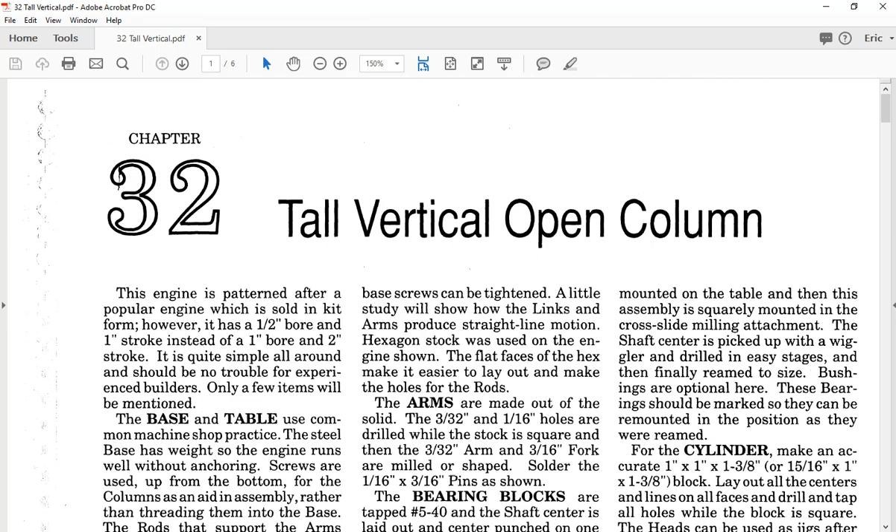Now, this is from a magazine that is no longer in publication, and it focused on model steam engines in England, the UK anyway. The pictures are horrible. Don't worry about it. You don't need them. Here's the view that you need to put it together. I know because I have drawn every part of this and done this assembly multiple times. This is all you need. Are there some weird things about this? You betcha. And we're going to go over those now.

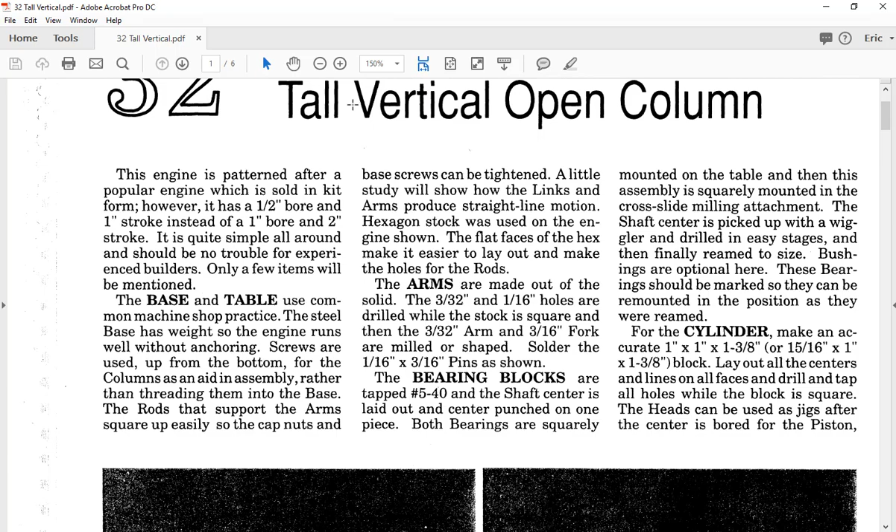First word of warning. All of these words in here are probably as important or even more important than the drawings. You need to read all of these words. There aren't that many of them. Another issue is that this was not drawn in any ANSI standard. This particular individual used fractions. We don't use fractions in manufacturing. We use decimal equivalents. Your role in this is in your drawing package, you will hold the decimal equivalent to whatever the fraction was that they called out. And you need to understand that.

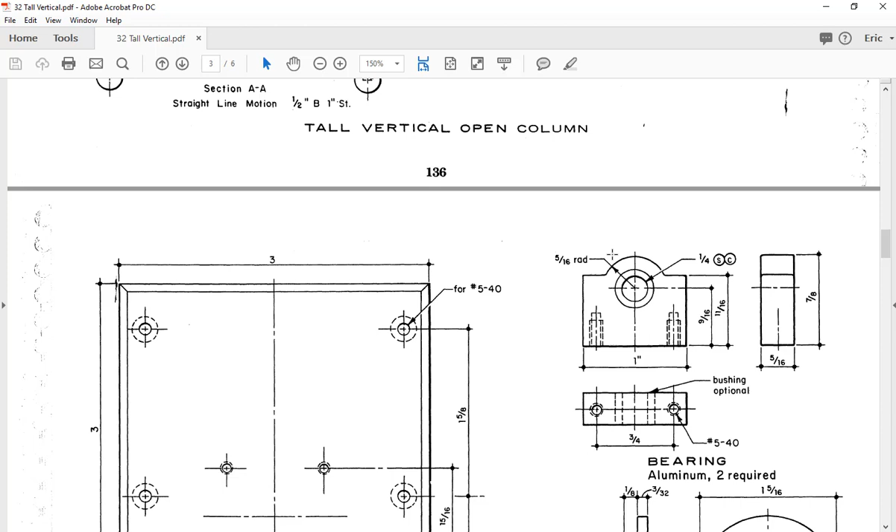Will some of these be 9 decimal places? They sure will. But the person or engineer or whoever drew up this set and presented it called that out. So we're going to hold it. As stupid as some of them are, we're going to hold it. Just like real life.

So we're going to go over each part individually, and this video is going to get rather long. I would pause right now. I would open up a Word document or a Notepad document or whatever you Mac people use to take notes, and type some stuff out. Totally valid is also a piece of paper with a pencil. That's fine. I'm just going to give you notes on almost every one of these parts on some of the vague areas that do exist.

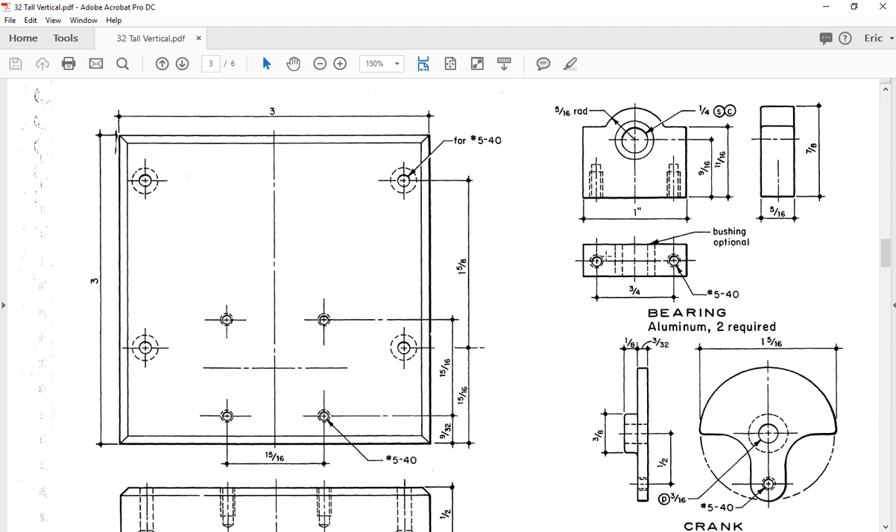There is no real way for me to divide this up. I've tried drawing lines on this, and it just was a disaster. Everything is too close together. So you're going to have to pay close attention. We're going to go through this entire thing. Some of these things, the name of this part is base. That's what we're going with. So we're going to start at the top. We're going to start with the base.

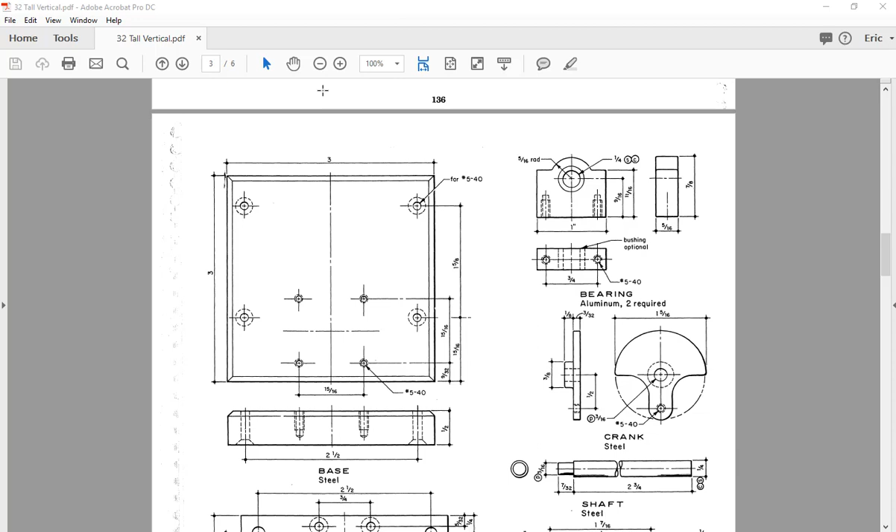There are only 2 views for the base. There's the top view and the front view. And let me zoom in a little bit. Pay very close attention to what is top and what is bottom. This particular part has holes, countersunk holes, coming through the bottom. These 2 outside holes here represent these 4, but they're looking through the side. And these 4 holes are represented in this view by these 2 stopped tap holes for a number 5-40. And again, he's calling out fractions. You will never call out fractions unless you're building a house.

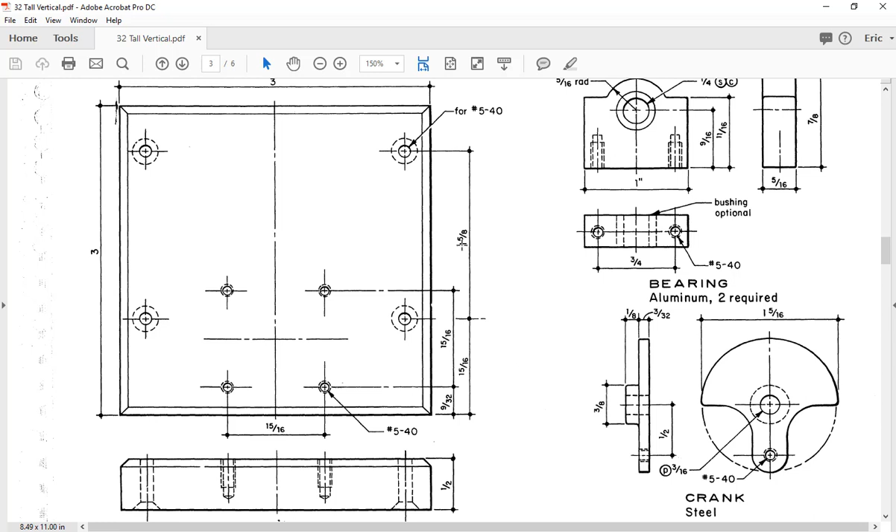That's the base. Let's come up here to the bearing. The bearing, 2 required. Going to throw a wrench in this. This says bushing optional. This bushing is not optional. This bushing is required. That bushing is bronze. So this is now a subassembly because these are 2 parts. These are now 2 unique parts. You have the bearing and you have the bushing and you have the subassembly of those 2 things put together.

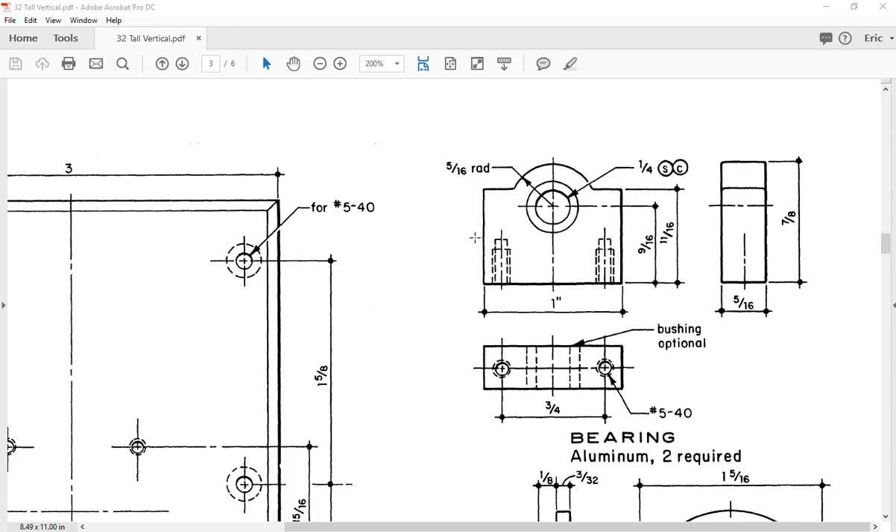How deep are these holes drilled? I have no idea, but if I just look at it and eyeball it, I would say that they're about halfway through, right? These are stopped holes from the bottom to mount it. They look as though they're about halfway through. You are going to make that determination. That is going to be in your part, and you will carry that into your drawing package so that when someone looks at your drawing package, they will not have the same questions that you have. Your job is to answer every question.

That's the bearing. The crank is steel, just like in Three Sisters. If I say aluminum, it's 6061-T6. If I say steel, it's 1020. The crank, couple of things.

What is this radius right here? I have no idea. It's whatever that is. Put a fillet there and go, that looks about right. There is no rhyme or reason to it. The feature is there to lighten it. It's just to lighten it, that's it.

Some people have asked me, is there a fillet here? Which is right here in this view. Is there a fillet here? I don't know. Could be if you wanted to. How wide is this from here to here? I don't know, but I will say that it appears as though the edges of this feature are in line with this boss. So I would say it's close to 3/8.

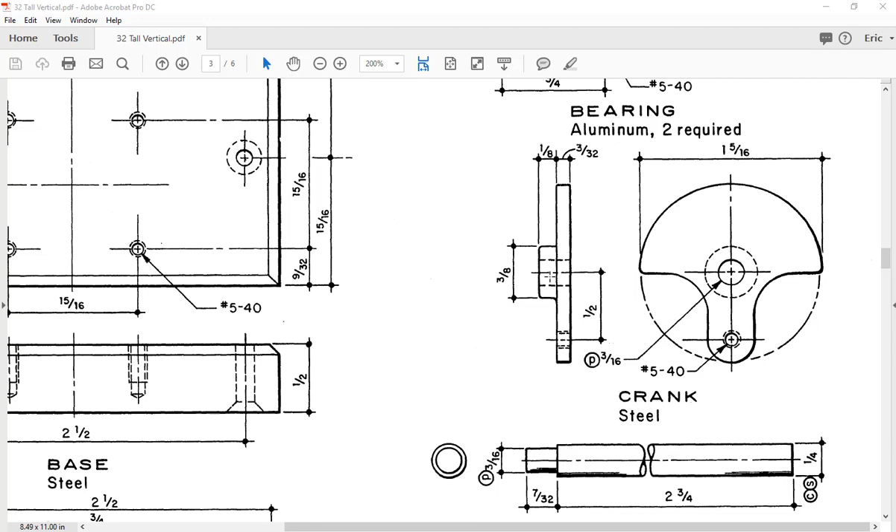So that's the crankshaft. This section view right here is just to make this part able to be drawn in a smaller space. This is not an actual feature of the part. It's just so that it'll fit on the page. There's nothing particularly complicated about this. It's just a cylinder with a turned smaller cylinder on the end. Ignore these callouts here. The individual that drew this made up his own callouts. We'll discuss it later. For right now, they don't make any difference to you.

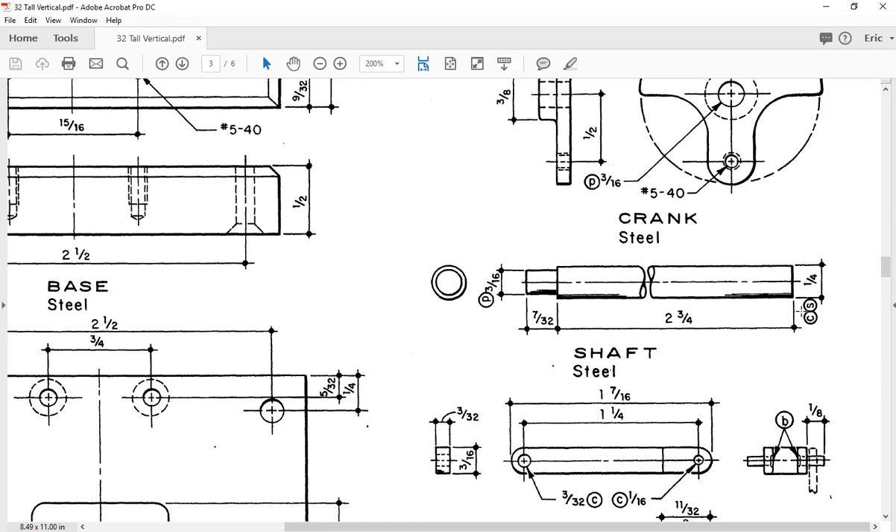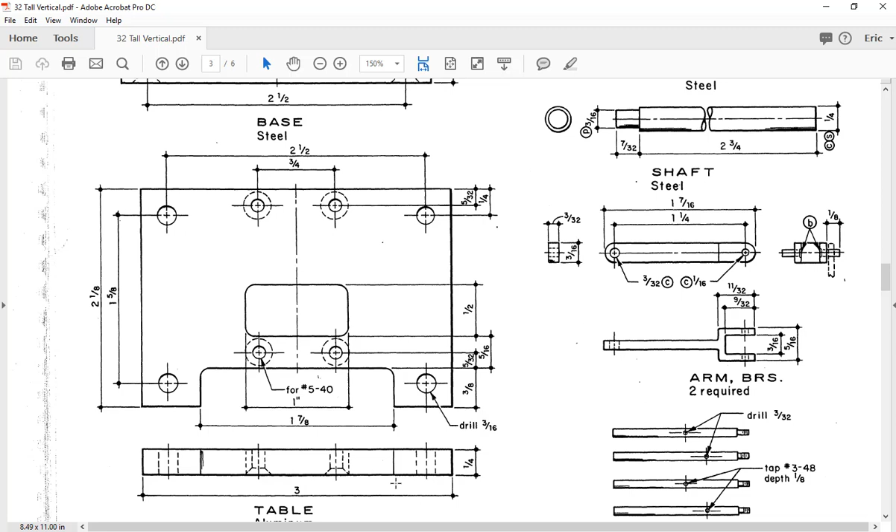Let's go over to the table, I think is what they call it. It's aluminum, so 6061 T6. Just like the base, pay attention to top and bottom because some holes are through holes, some holes are countersunk holes, and if you drill a countersunk hole from the wrong face, you have a problem. Not a whole lot of notes on this. The measurements are all there. There's no stopped holes. They're all through, but again, some of them are countersunk.

Now, when you go into SolidWorks to drill a countersunk hole for a number 5-40, guess what you won't find? You won't find number 5-40 because a countersunk hole for a certain number of screw has no relationship to the number of threads. So you will find a countersunk hole for a number 5, but you won't find it called out for the number of threads per inch. Don't freak out. A number 5 countersunk hole is the same as a number 5-40 countersunk hole because there are no threads in this hole. This is a clearance hole with a countersink for a number 5 screw, regardless of the threads per inch.

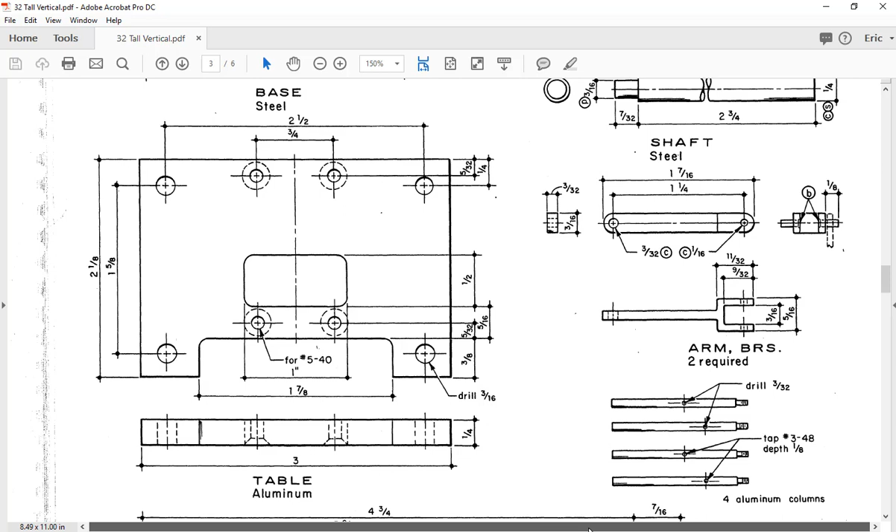Go over here to the arm. And this is a confusing mess here. Because this was a magazine article, they were limited to a certain number of pages. If you've ever written a magazine article, you would understand that you are paid by the page. So as the author of a magazine article, I would make my article as long as possible, so I would get paid more. The publisher, on the other hand, their job is to shrink your stuff to fit in the fewest pages possible. And that's why we have this mess for this arm.

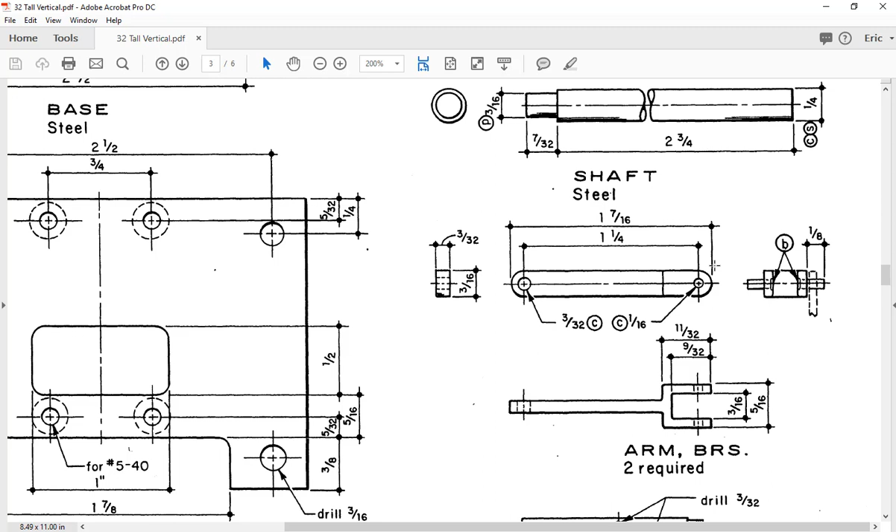If you look, we'll say that this is the front, bottom, left, and right side views. This right side view, totally cheating. This is also sort of a subassembly view. That's why it looks different. There are other parts involved in this. The only parts on this view that are actually this part is the end view here and here, right? Which is here and here and here, but you can't see the other one because of the view that it's in. This note is for the assembly. We're not going to worry about that for this.

Column. There are 4 of them. You are required to use configurations on these. I'm going to say that again. You are required to use configurations on these. Make that note. You are not drawing 4 individual parts. You are drawing 1 individual part. You are making modifications to the hole type and hole location here. These 4 views here show the 4 different versions of this.

They are aluminum. You can use the hex option if you want to. I find the hex option actually easier to draw on because there are surfaces to sketch on, as opposed to the round ones, where I would have to create offset planes to sketch on. It's personal choice. I like hex personally, some people like round.